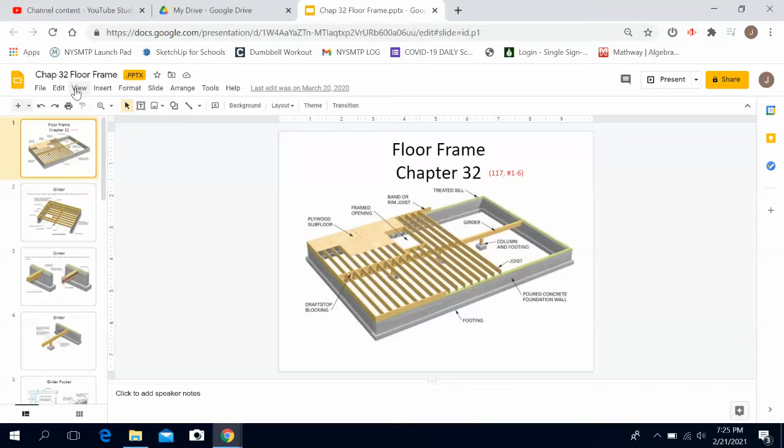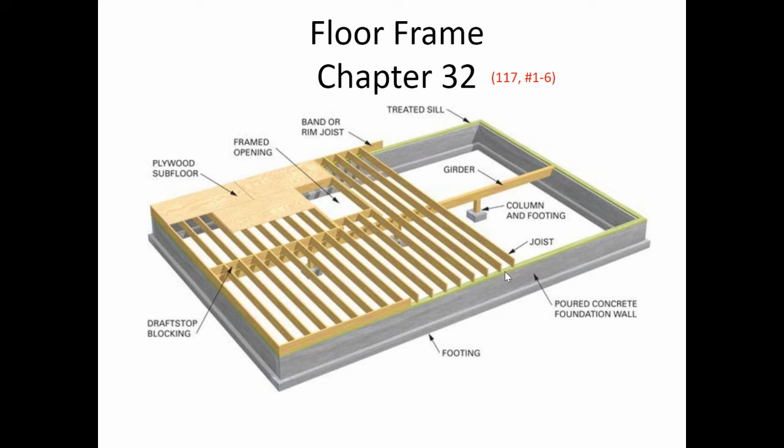Here we go. Everything you ever wanted to know about the floor frame for a typical residential house. All right, so we're familiar with some of these things already. We got the footing down below, we've got our foundation wall, we've got our mud sill or sill plate running around the outside, and we've got our girder. And so the main component of a floor are boards that run across this way, and they are called joists. There it is, joist.

All right, here's a much better realistic picture, kind of a cutaway picture. So we've got the girder running down maybe near the middle of our house because the house is usually wide enough where we can't get lumber that stretches from one side to the other side. So we have to rest the joist on the sill plate over here, and then it'll rest on the girder over here. So you can see we got two pieces here that span the whole entire distance, and they kind of overlap right here in the middle.

Just some other things to point out. There's always some kind of opening, right? This is going to be an opening for the stairwell. So you would have stairs maybe going down into the basement. Oh, this is a short basement. So that is our stair opening. So a lot of times you'll see that they'll double up. So right here, these are doubled up floor joists because we have this big opening. So we got to make it stronger. So we have a double floor joist here, double floor joist over there.

This thing's called a header. We'll see that term again when we build walls, but kind of just going across in the opposite direction. Header, header here. And then when you have these short pieces, they're called tails. This piece right here is called the joist header that runs there. It's also sometimes called the rim joist. And this over here is the end joist. So that's how we're going to start this thing. We're going to start with a joist header, an end joist, and then another joist header, and then an end joist, and that's kind of called the box.

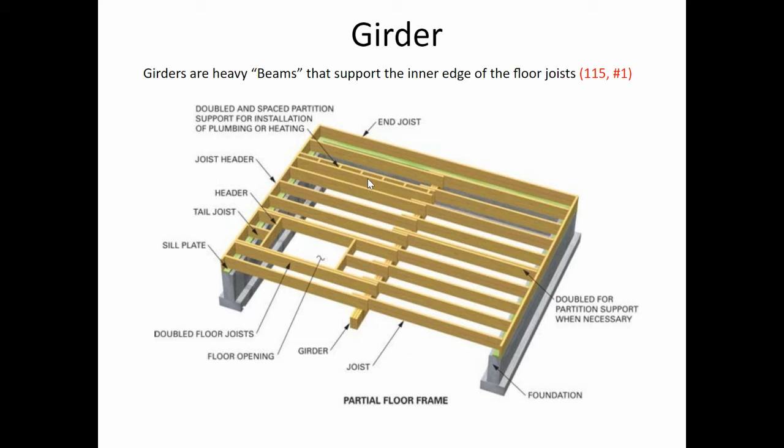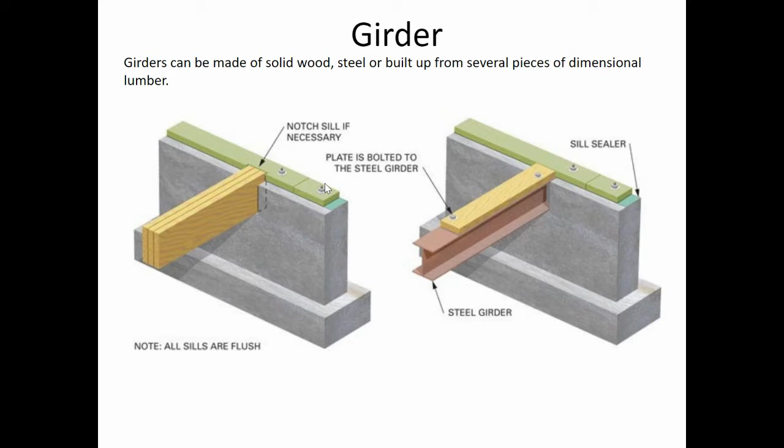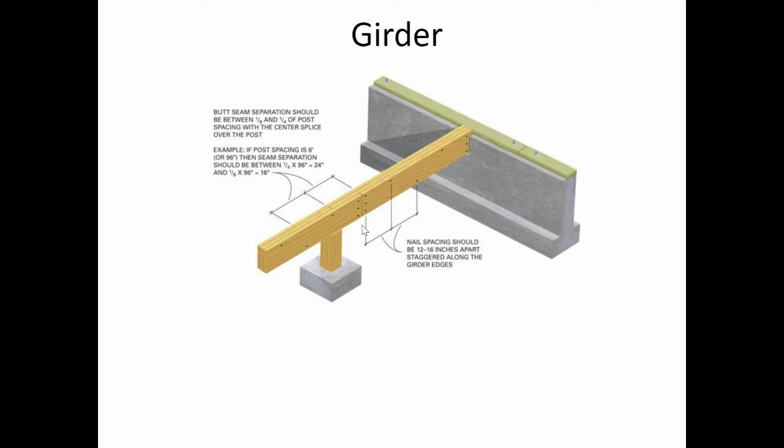All right, here is a better view of what we've already done. We've got the sill plate. The sill plate was notched out, and there's our built-up girder sitting in the girder pocket. And you'll see the top of the girder is flush with the top of the sill plate. And you can also see that the sill plate is flush with the exterior foundation wall. There's our built-up girder, right? There was three pieces, and we had to offset these seams to make a nice strong girder. There's the girder pocket.

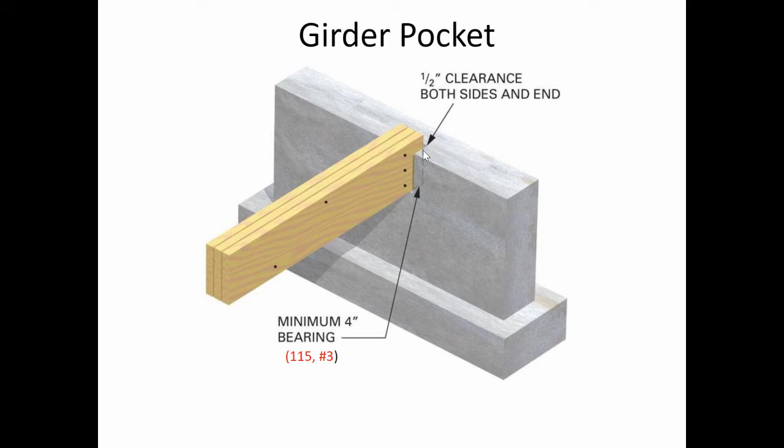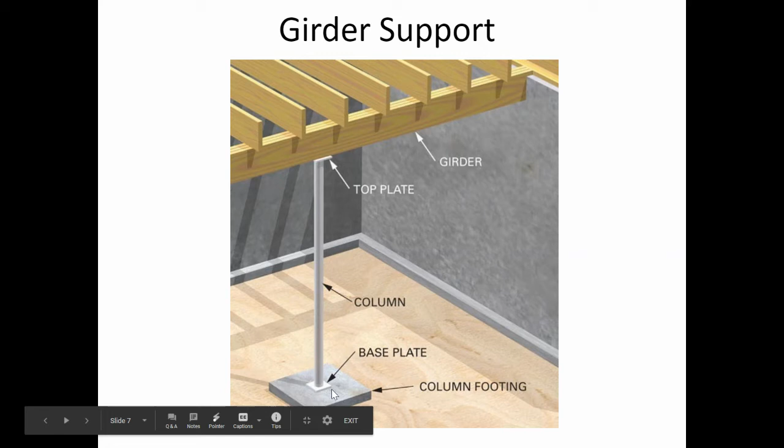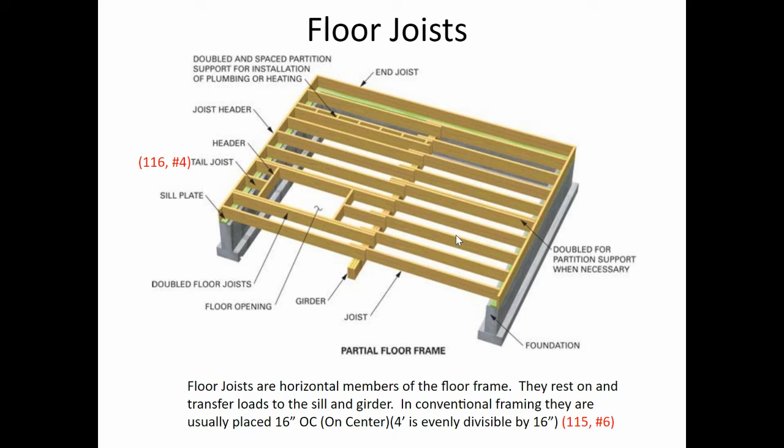And here we go. There's the same picture again of our floor joist. This time we're just talking about the spacing of the floor joist. So from the center of one floor joist to the center of the other floor joist is what we call 16 inches on center, 16 OC. So from the center of one to the center of the other is 16. From the center of this one to the center of this one is 16.

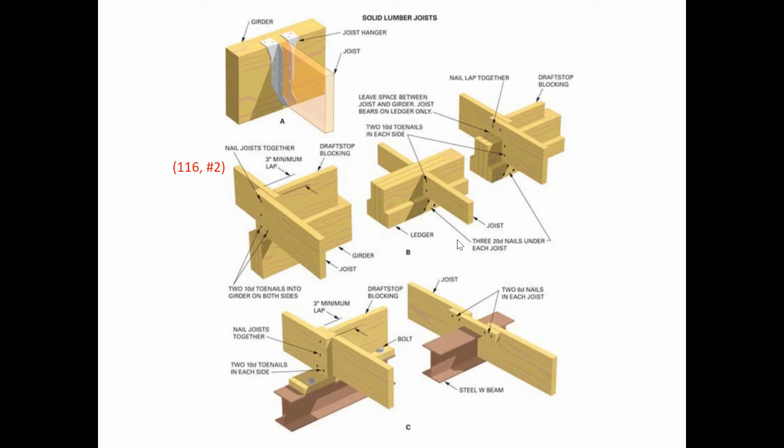And these are just different details on how they overlap or how they meet the girder in the middle. This is how to lay out the girders. Sorry, the floor joist. Again, it's every 16 inches on center. So you don't want to measure from one to the other one, to the next one, to the next one, to the next one, because you can make a mistake on every measurement.

So what you do is you hook your tape measure on, you stretch it out, and when you look at the tape measure, you'll see they put a little red diamond or red letters right at every 16. So there's 16, there's 32, and so on and so forth. And you'll see this when we do some construction on a shed.

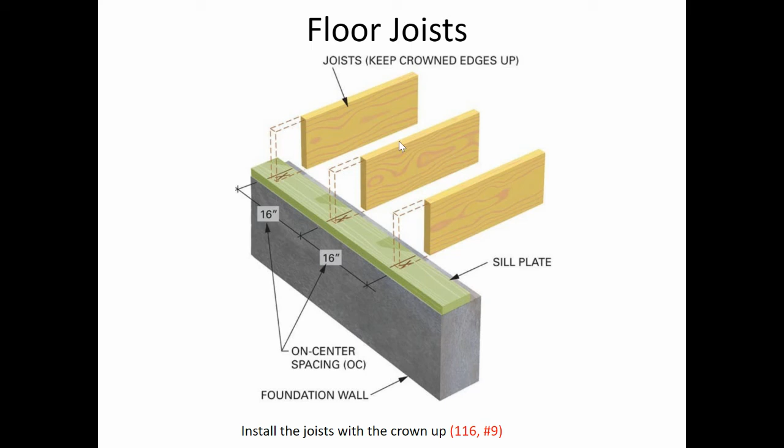An arch is strong, so you want the arches to go up. So if we make all the arches go up, the floor will be stronger and it won't be wavy. Think if you had an arch up on this one and the arch down on this one, it would be kind of like a wave or a roller coaster.

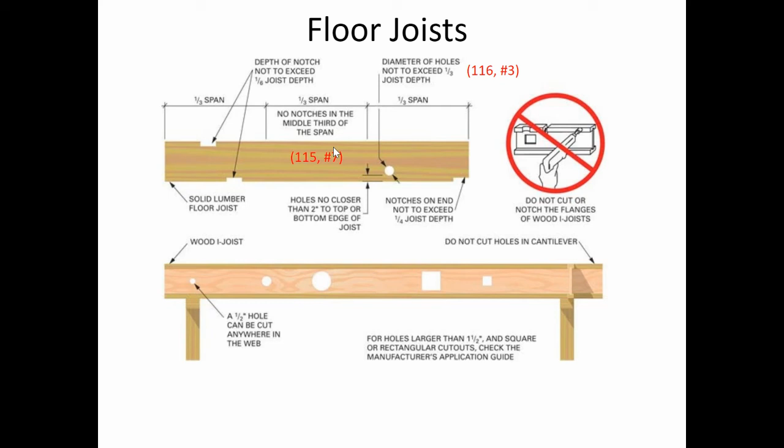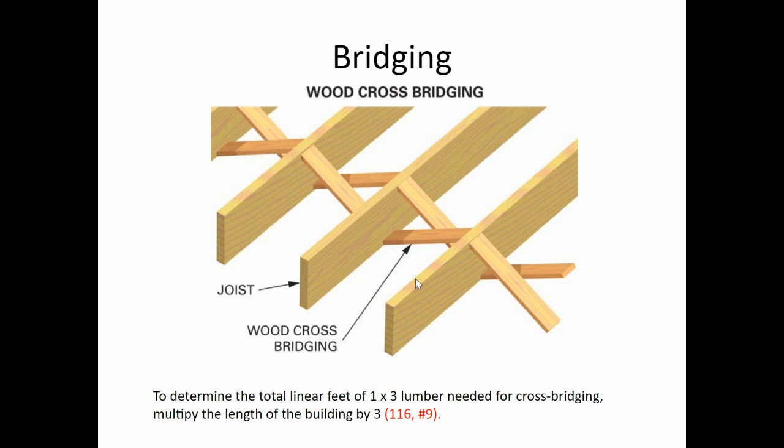And then finally, in those other pictures, we didn't see bridging. Maybe you've seen this before. If you're in a basement, sometime you look up, you'll see, to stiffen up the floor, they cut these little diagonal pieces of wood. Actually, now most of the time they're metal straps, and it really makes the floor a lot more solid. And you could also put solid bridging in there also, but that is called bridging.